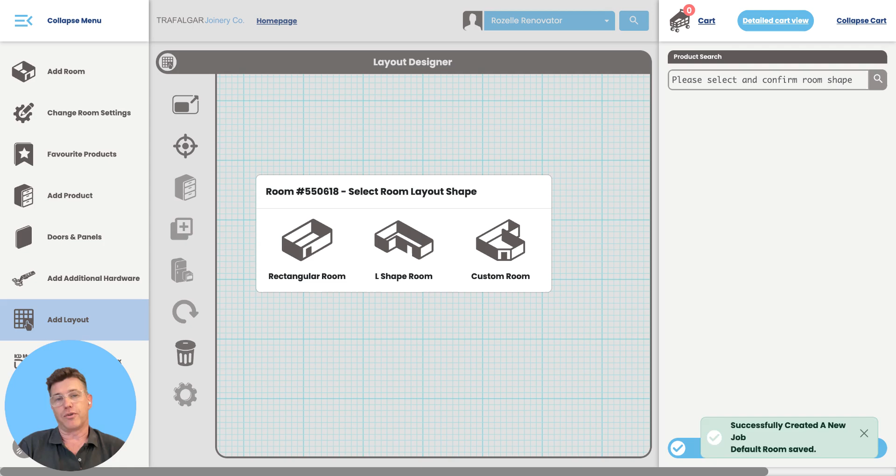When we're customizing your job, we'll be doing it through one of three ways. You can choose from rectangle, L shape, or custom room. Today we're going to choose a rectangle room.

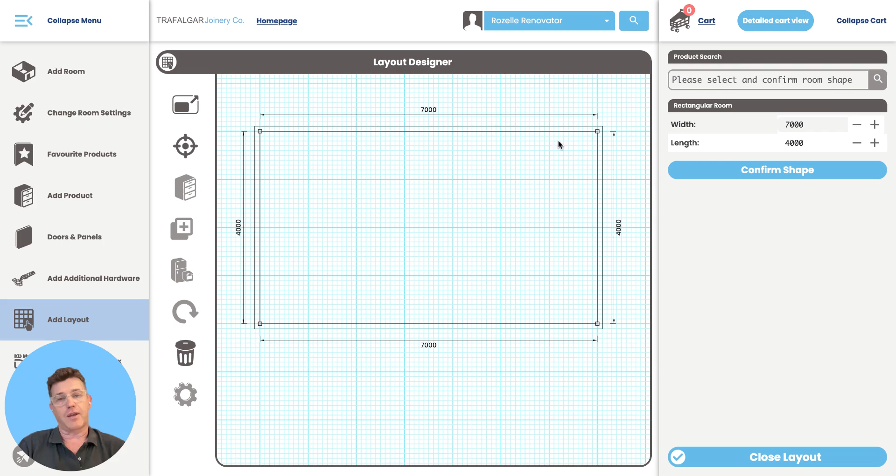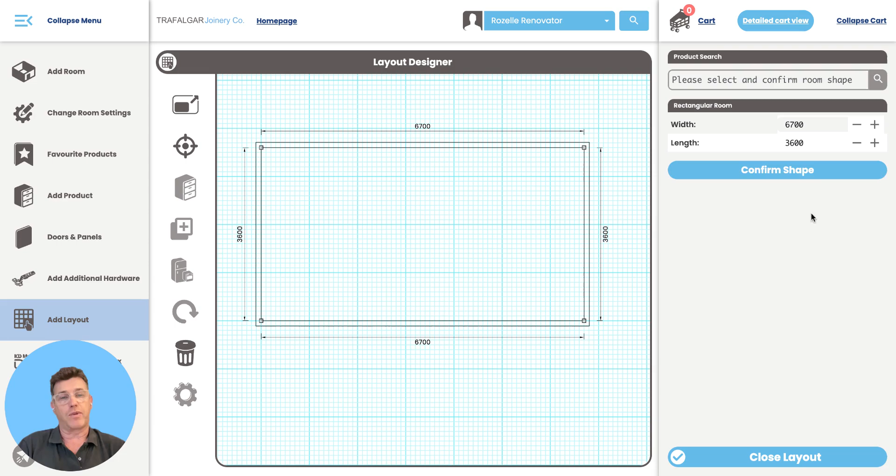To customize the dimensions, you can either manually enter data on the top right hand side, or if you click on the corner, you can actually drag and resize the room. You can also readjust the location of the room. So if we're happy with that, we're going to confirm the shape, and the changes are saved.

Today's video is basically to give you the basics of how to set up a room and how to work your way through the system to get all the features that you require.

We have two menus which we'll quickly take you through now. On the main menu, the add room feature is very handy because you may want to add rooms within your job. What it basically does is break up your cabinets list both from a design point of view and from a budget point of view. We do that through this button.

We have the change room settings. We have favorite products, which in the next video we'll talk about how we get you to go through the range of cabinets and actually select your favorites and flag them with a star. That makes it much more streamlined when you go to design your kitchen, and refines the range of products that you need to scroll through.

We've also got a doors and panels button, and we've got the add additional hardware option. The edit layout button is also crucial, because if you get somewhere in the system and you need to get back to this page, the edit layout button brings you back to this layout view of your job.

So on our second menu, this one pertains to the actual layout drawing itself. So there's toggle full screen and recenter the room options.

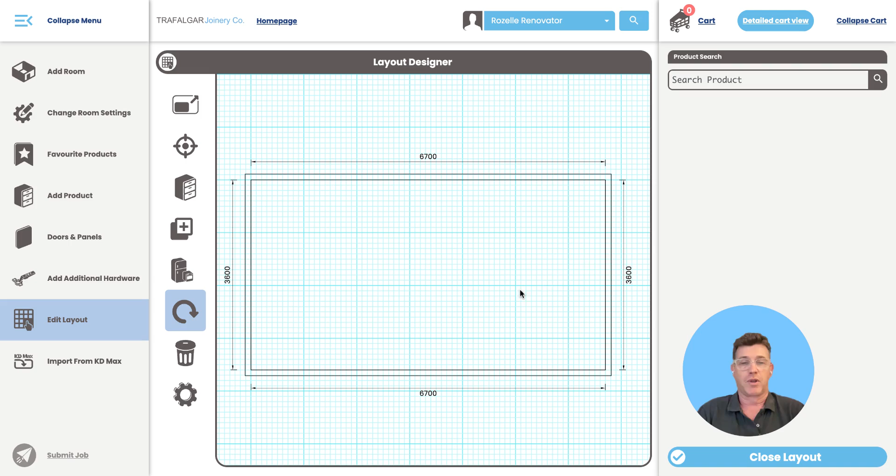We've got a rotate room option, and we've also got a clear room option, and settings as well. So that pretty much wraps up what we want to talk about today.

What I'd like to quickly show you, as a sneak peek of how this will work in the second video, is how to start adding products and cabinets to your drawing. We use the Add Products button, which brings up your selections on the right-hand side. You can either use that button or type into the search bar, and we have categories for upper, base, tall, component, pantry, and favorites.

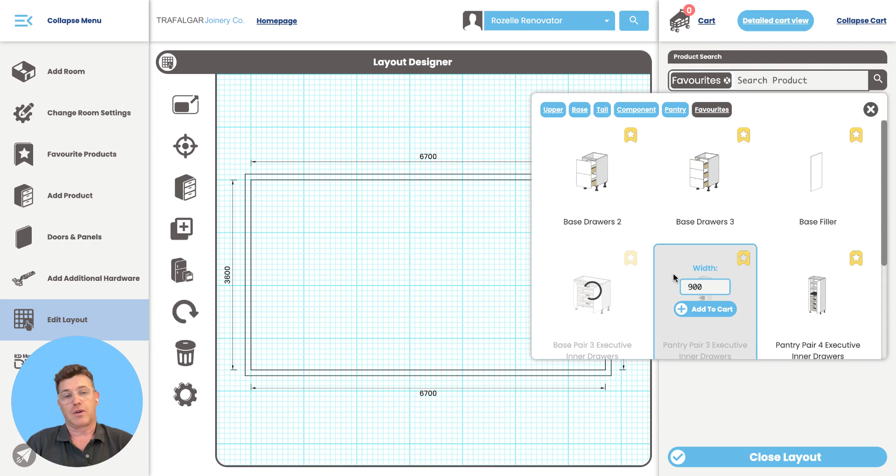So in favorites, here's ones we've pre-selected earlier, and for example we might put in a base pair with drawers. Once that's chosen for the shopping cart, it appears on your drawing.

This allows you to drag and drop, and generally what we're looking for here is to be up against the wall, so we make sure it clicks hard up against it. If we're on the left-hand wall, you can see it actually spins. If you hit the space bar, that also spins the item 90 degrees.

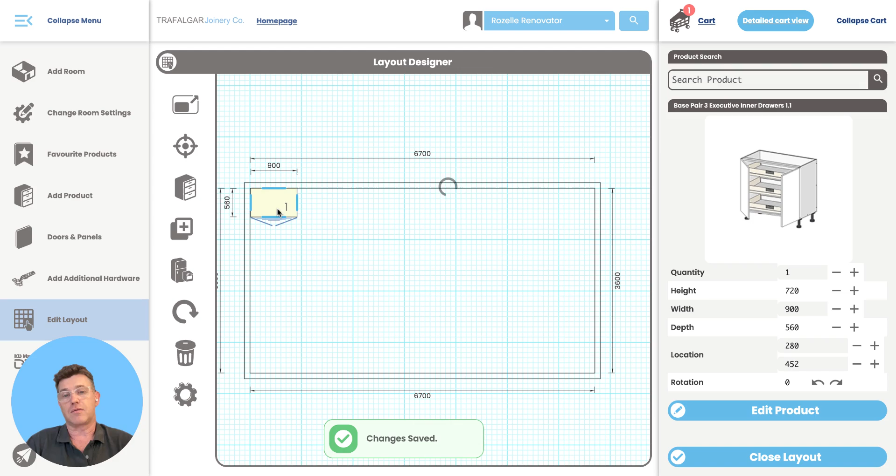So for the sake of today's project, we're going to add one. At this stage you can also click on the item to look at a preview. You can change quantities, dimensions, and some basic information, and you can also rotate the item using the button here.

If we want more detail, we can edit the product further. This opens the 3D drawing, so you can pivot and rotate to get more detail as well, and update the product.

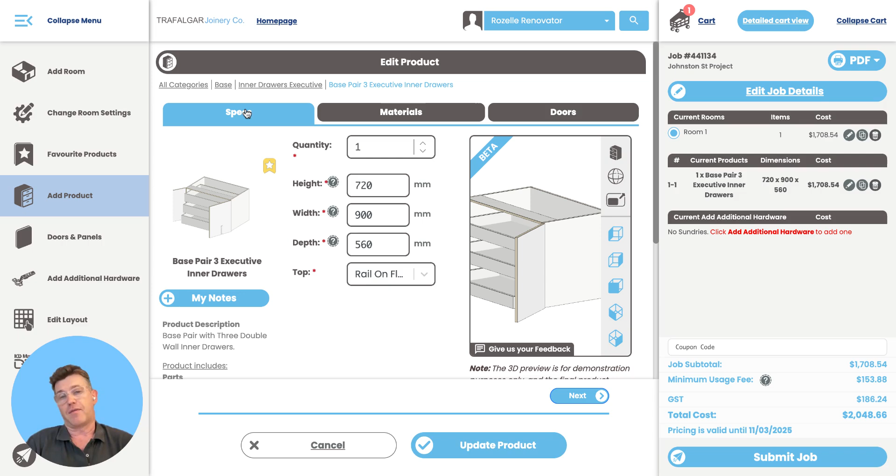At that level, you're also looking at the specs. There's a materials tab, so we get to choose the colors and some detail around the materials, and we've also got the doors. When you're looking at materials, if you type in ply, it opens up all of our ply products for you to choose from.

In relation to edge, that's a default with nil because we are a plywood supply business, and you'll be supplied beeswax for the edges, which is great if you have any damage whilst you're installing. You can simply apply beeswax to the carcass edges. Okay, so we're going to update that product.

So in the second video, you'll go forward with your design. As a tip and trick, we'll get you to first go through and tag all your favorite products with favorites. That makes it so much easier when you're deciding to build your layout.

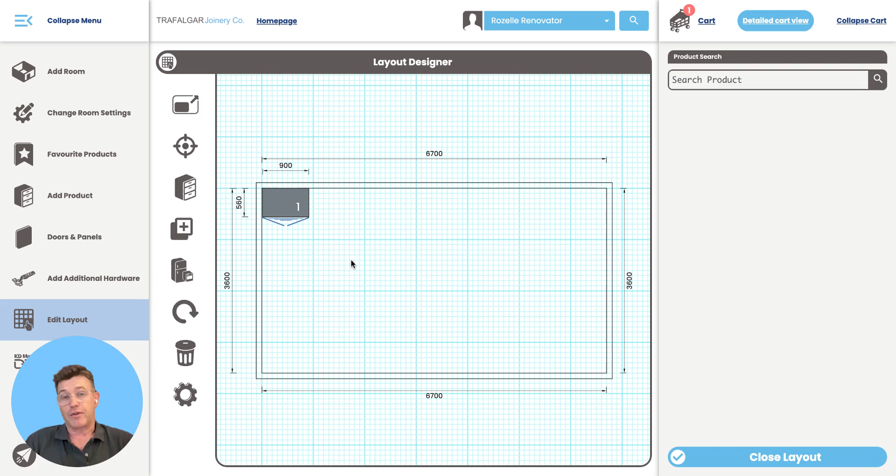We also suggest that once you've done that, the second phase is actually dragging the individual cabinets onto this layout, because you can adjust your design, and as we've just gone through, you can edit each of those individual cabinets as well.